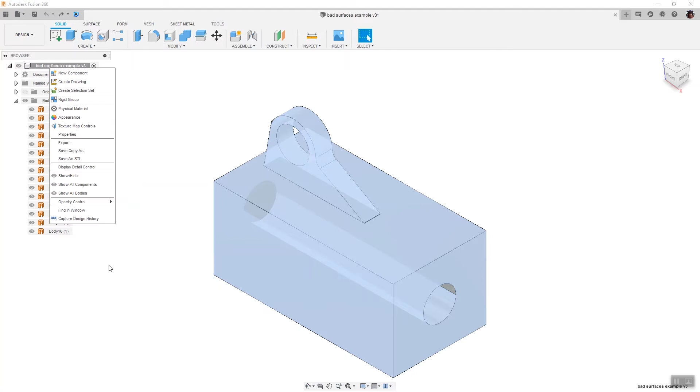Fusion offers a command called validate, which is only available when the timeline is not active. Thankfully, this is the case for all imported geometries. It's located under the Inspect menu.

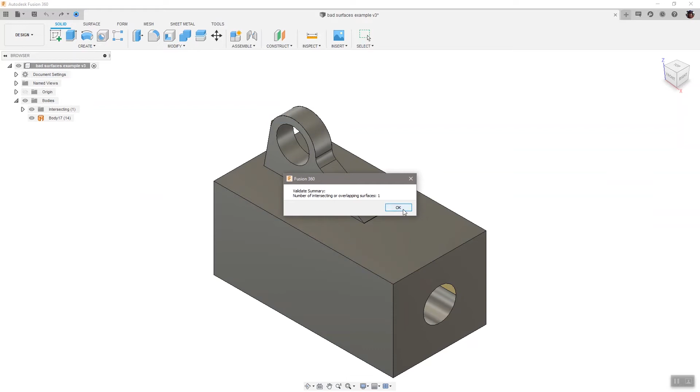It also has an option to automatically repair all of the surfaces that it inspects. Choose this option and then just select all the surfaces under your body folder. With any luck, after a few moments of calculation, the software will automatically repair any problematic surfaces and stitch this up into a watertight solid for you.

If this is not possible, the software will do the best it can, stitching up all the surfaces that are available and giving you information about those which are intersecting or causing difficulty. At this point, you can use the commands on board with Fusion 360 to delete surfaces which are causing trouble, like this one here, and then move into the surfacing environment in Fusion 360.

Here we have commands available like the patch function, which allows us to select the edges of this open loop, closing the hole in our model and allowing us to move on to the stitch command, which will close the hole, making our model a watertight solid.

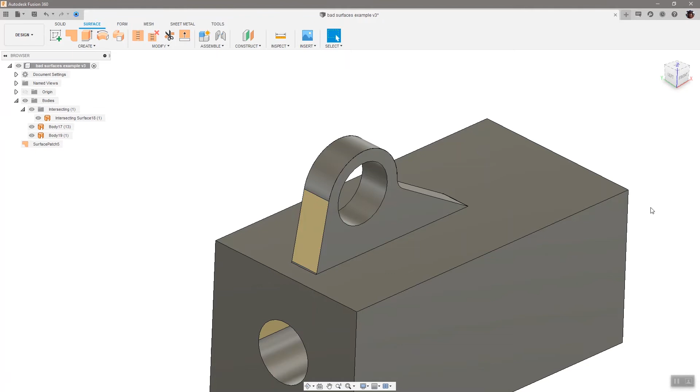The stitch command itself has a lot of extra features that you need to know about when trying to repair models like these. The red and green lines shown on the surfaces I'm trying to stitch together show points where the surfaces are able to be stitched together, green, and red lines indicate open surfaces.

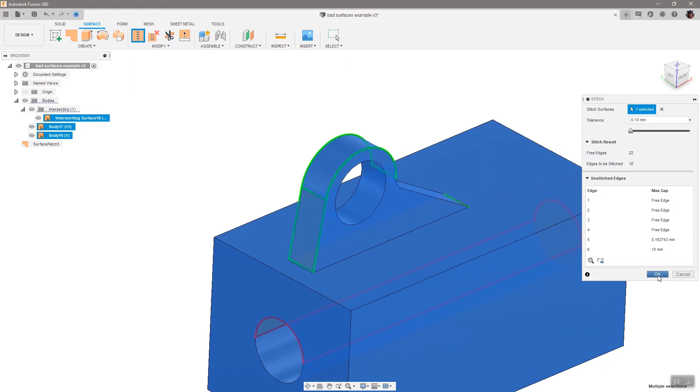Using these visual cues, I can find out if my surfaces are coming together and adjust tolerances if needed, and I can also figure out where I still have open holes.

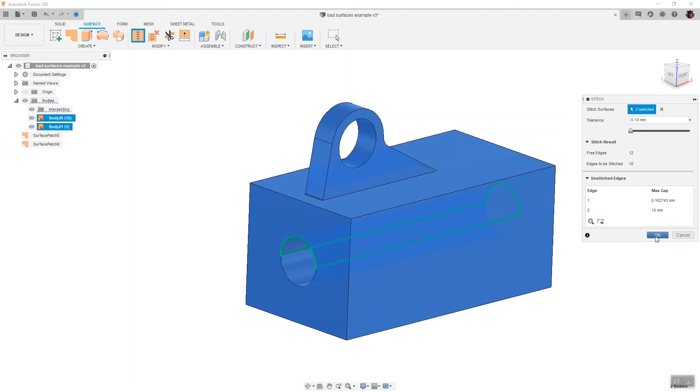Quite often these holes are very small and it can be very difficult to see them. In this model, I have several open holes, so I use the patch function several times in order to fix those holes and stitch the surfaces together.

Using the stitch command to figure out where those open loops are can be pretty important. This model looks to be in order, but if you look very closely under the stitch command, you can see that red line, and there's a very small sliver surface here that was missed during the import.

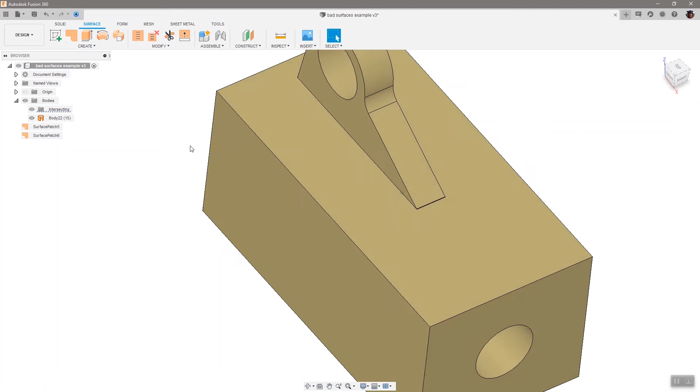That's not an uncommon problem. By using the stitch command, you can find these easily, patch them up quickly, and then stitch again. Eventually, you'll end up with a watertight solid, which is what you want when you're using a mechanical CAD system like Fusion 360.

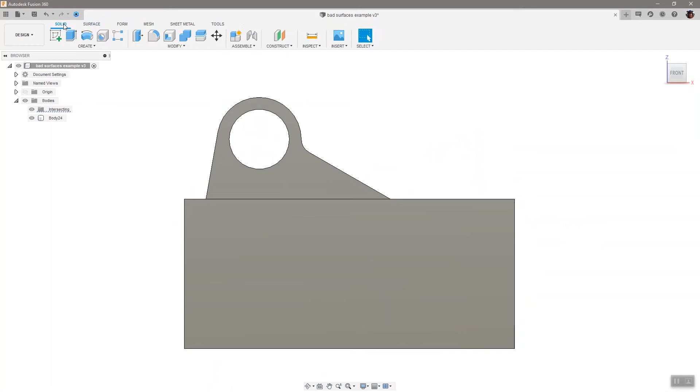These problems typically happen with imported IGES files. Something about the mathematics of the way these files are made causes this to happen quite frequently, and not just with Fusion 360. So most tools have some kind of import tool to handle issues like these.

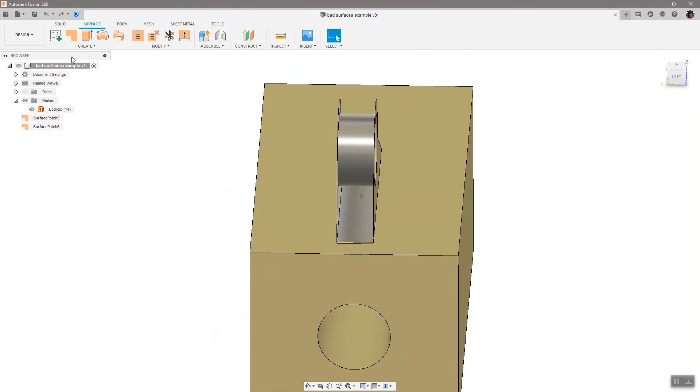Thankfully, most of the time solving these issues is pretty easy. But not all of them are as easy as just using patches all over the place. Let's look at this example here. While it's missing a surface, obviously, and you can use the patch command, you do have to be careful.

The patch command will work, but it makes a rounded surface here at the top, and that's not what we wanted. That's not the designer's intent.

I decided this time to use a 3D sketch to break my patch up into several little pieces. I was able to connect these two tangent points on the circle and use a sketch line instead of a model edge, as I had used in the other patches.

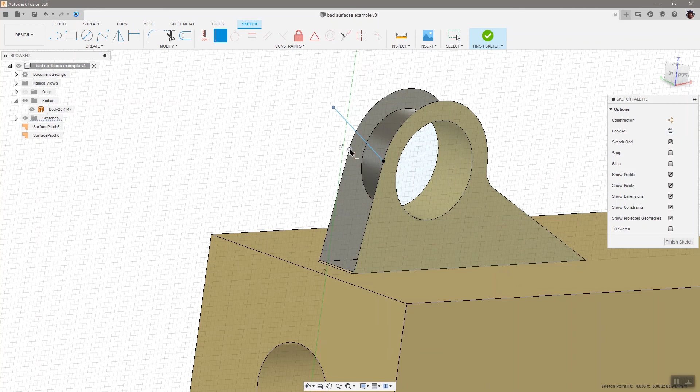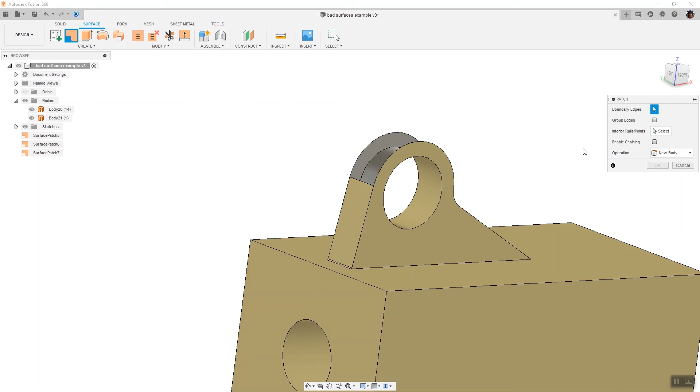This is easily done using the 3D sketching capability of Fusion and projecting the 3D elements into my 3D space. After I have this line, I can use the patch command as before, this time not using the chaining command, creating first one patch and then repeating the command to create a second patch around the top of the radius. This creates two separate surfaces, which I then use again in the stitching environment to create a watertight solid.

Working in collaboration means you're going to have to work with other people using other CAD systems, and you're going to need to know how to deal with some of those files that aren't as friendly and as easy to use as those Fusion files you're used to.

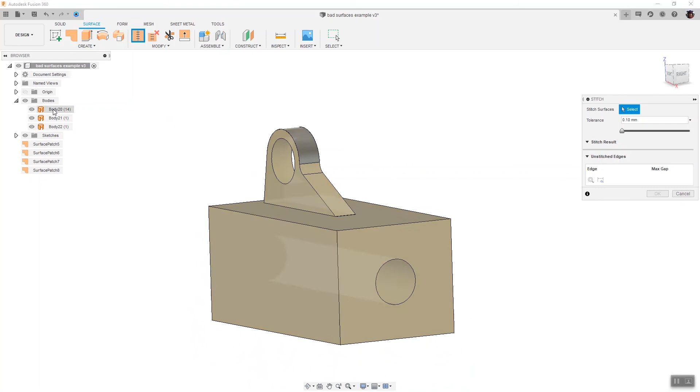Being able to repair some of those files quickly and easily in Fusion 360 is a next level skill. I do hope you learned something today, and as always, good luck.